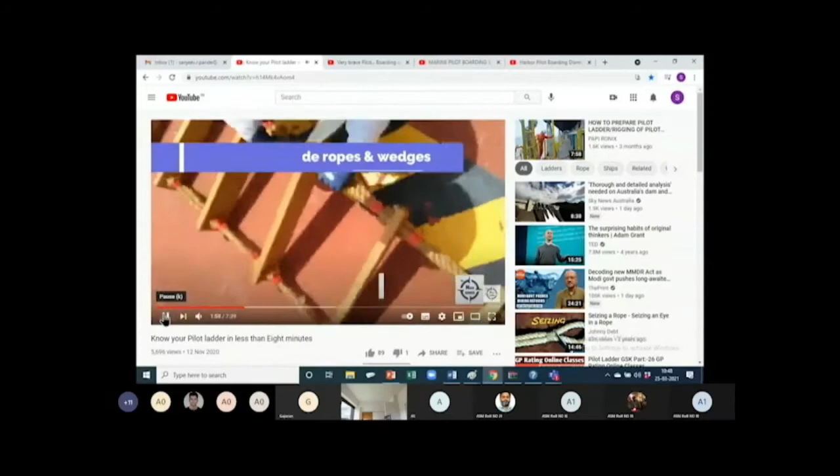Carry out your physical inspection of the ladder. It should all be in clean condition. Inspect the side ropes and the wedges. There should not be any missing wedges. The side rope should have a firm grip. Make sure it is in order. That's a bad example. It should not be like that.

Let's inspect the steps now. The steps should be clean. They should not be painted. They should all have non-slip surface, including the rubber steps. Check the condition of the rubber steps, that they are not cracked. Once again, they should be clean, firmly fixed. Spacing should be even. Look at that, a broken and cracked step. Make sure you don't have that. That's a very shabby ladder which could come off at any point.

Make sure that the side of the ladder is marked with heights along the length. There you can see 6 meters, 5 meters, 4 meters, and so on. We're going to inspect the spreaders now. Check the condition of the spreaders. There should not be any cracks. Should be firmly fixed. Spacing should be even. Let me show you an example of a very, very badly fixed spreader that's really dangerous.

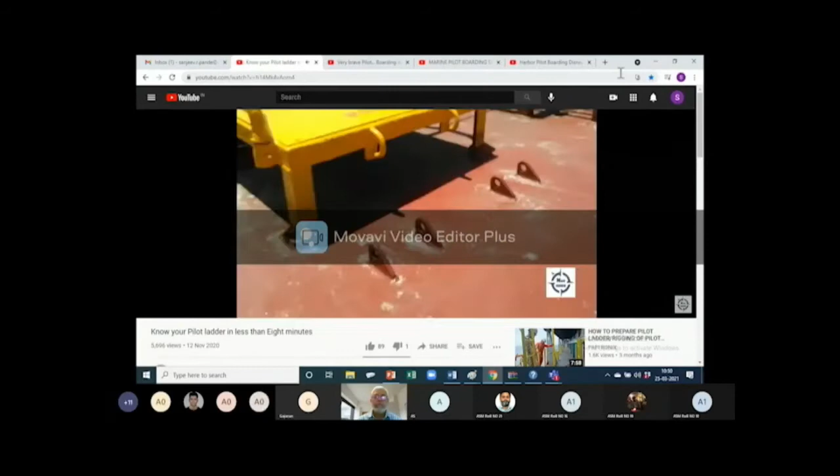So this is the marking which relates your ladder with the certificate. It should be clearly marked. The pad eyes on deck should be color coded with SWL, unlike this one which has no markings at all. The pilot access should be firmly marked on deck in clean condition. The duty officer must be checking this, unlike this one. The pilot ladder must be marked with tags for easy identification with your PMS.

The length of the ladder should be enough to reach the water line in any condition. Now that we have finished with the static checks, we are going to go for the rigging of the ladder. Let's rig it up. The rigging of the ladder must be done safely under supervision of a responsible officer. The ladder must be made fast on deck firmly using the pad eyes on deck, using strong shackles. There should be a life buoy next to it with a line and a light, but the line should not be connected to the buoy.

It should be firmly resting on the ship side with all the steps touching the ship side, and the area should be free of discharges. Look at that ladder. It's a very poor rigging. None of the steps are touching the ship side. If there is a tripping line, there's a right way to connect it. It should not be fastened to the bottom part of the ladder below the spreader. It should always be above the spreader level.

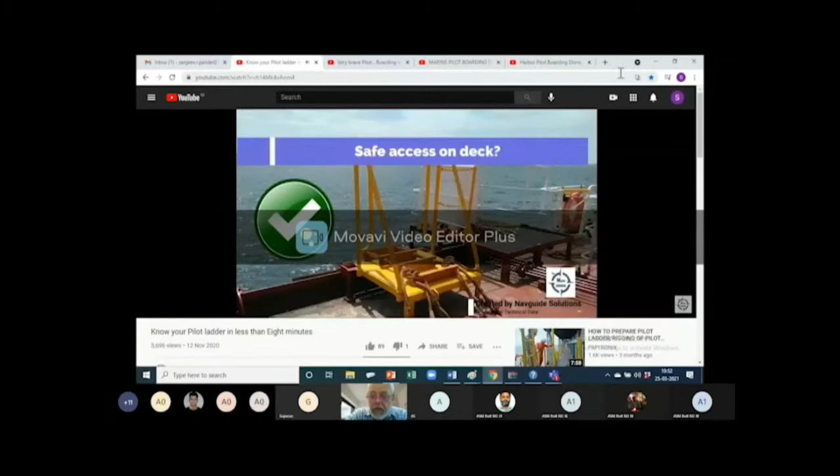Now, the height above the waterline must be suited to the pilot's requirements, and it should never be touching the water. The pilot ladder should be checked by the duty officer after rigging. There should be a safe access for the pilot to come up. That's an example of a very, very unsafe access. It should not be this way. If you are connecting man ropes as required by the pilots, they should be between 28 to 32 mm Manila ropes only.

Let's go for rigging a combination ladder and see what are the precautions to be taken over there. Now, if the freeboard of the ship is more than 9 meters, a combination ladder must be used. A single pilot ladder should not be used. Anyone who's involved in rigging of the combination ladder should always be wearing safety harness and life jackets. Proper PPE should be worn. Now, some ships are using a fall preventer device attached with a harness. This is extremely useful and increases the safety.

The angle of inclination of the gangway should not be more than 45 degrees. That's the inclinometer of the gangway, as you can see. The gangway or accommodation ladder should always be leading aft of the ship. It should also be connected firmly, attached to the ship side. The pilot's climb is expected to be between 1.5 to 9 meters, not less than 1.5, not more than 9 meters, and the pilot must be escorted to the bridge when he arrives.

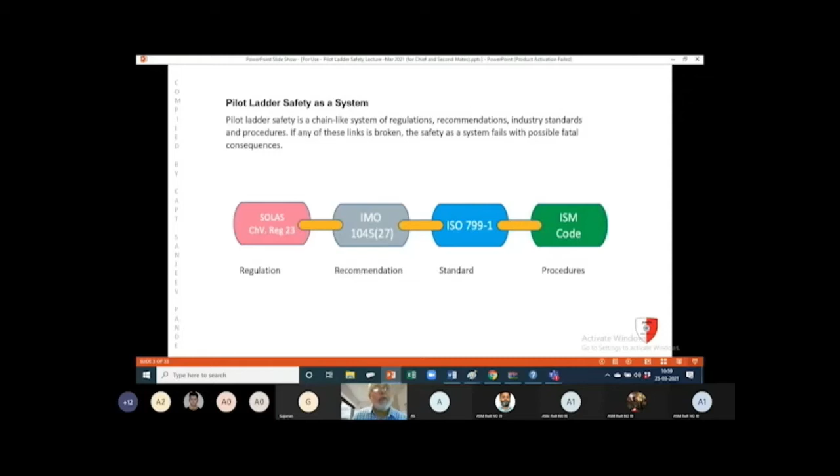So let's start with the basics, securing the ladder. We say, what's the big deal about it? But this is where a lot of issues arise. You see, there are regulations that talk about securing a ladder when it is required at its full length, the supplied length, whatever is supplied to you, the full length.

The lower part of the ladder is open, that's the lowermost step, and the upper part, the top part, ends with two thimble eyes. So the regulations say, attach those thimble eyes to designated strong points on the deck near the transfer point, and use shackles. And pay out the ladder over the side, and there you are. So all the weight is taken by the side ropes, which are the strongest part of the ladder, and that's how the ladder is meant to be. Take the weight on the side ropes.

Only thing is, the length, that is the lower step, may not be at the height required by the pilot, and therefore you have to adjust the length. This adjusted length is called the intermediate length. And how to secure a ladder so that it hangs at the intermediate length? Unfortunately, there is nothing specific mentioned in the regulations.

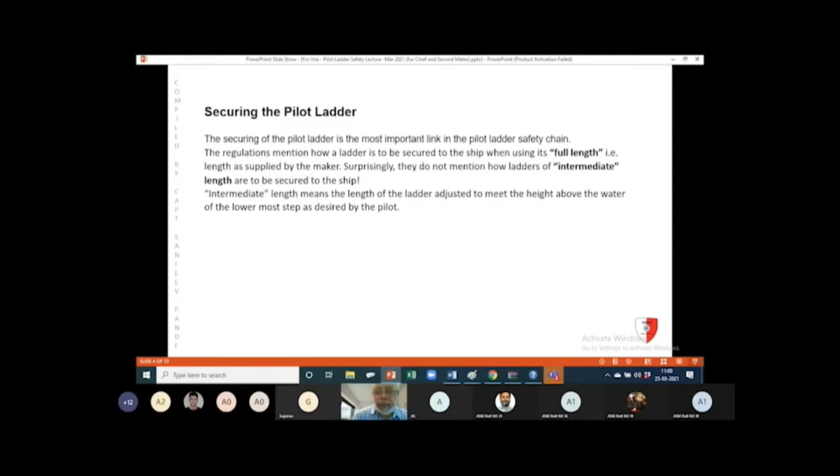So over a period of time, seafarers being very resourceful, they've come up with all kinds of methods, and we pilots and various associations of pilots have done some study and come to a conclusion that there is only one method which we recommend now that ships follow, which I shall talk about in great detail. All other methods should be avoided. They have all kinds of issues.

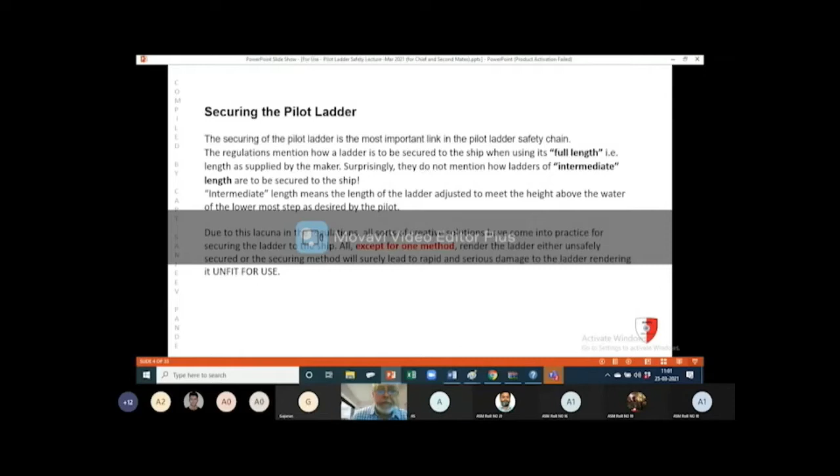One thing I would like to point out is that ships can no longer carry out repairs to the ladder on board, other than replacing a particular broken step or even the spreader. But the replacement has to be done with a part which has been supplied by an approved manufacturer of the same ladder. You cannot just get something or make something on board and fit it to the ladder. You cannot re-seize or reclamp the fixtures which support the steps. You cannot do that. You cannot put any splices to repair the ropes.

So in short, other than doing a simple replacement, that is, a broken step, take it out and put in a replacement step from a certified source, there's nothing more you can do. So it goes to show that if you damage the ladder by improper rigging, then at the next port or even for disembarking, the pilot will refuse to use that ladder. In fact, you should not be rigging it in the first place. That is what is meant by the words rigged and supervised by a responsible officer.

A responsible officer doesn't just have a cursory look and that's it. He is supposed to have trained the crew in the procedures, to ensure that any defects in the ladder are pointed out, and then the responsible officer will make a judgment whether this ladder is usable or not. And you have to take the hard decision of not using a ladder rather than putting out a defective ladder for the pilot.

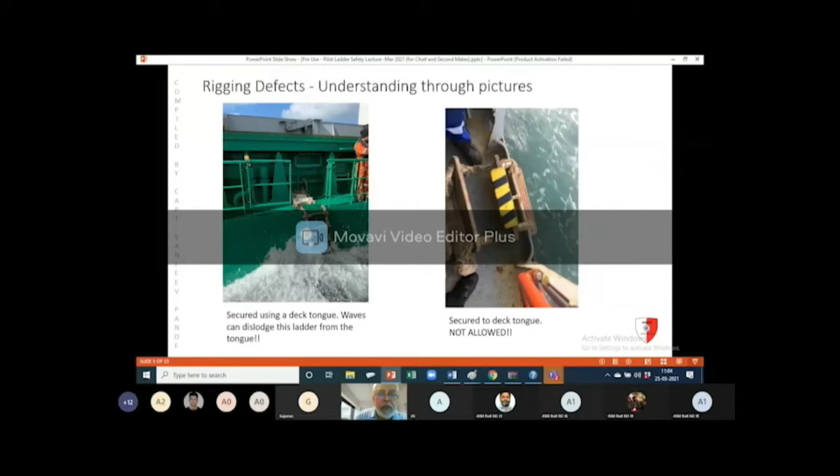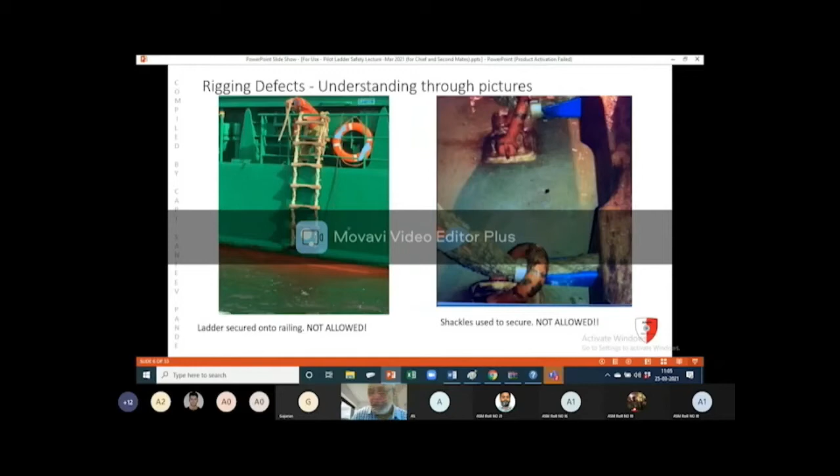You cannot repair it. And you can't just get ladders quickly. They have to be helicoptered, brought to the pilot station. Big problem for you if that were to happen. You found out that damage was caused by shackles. Ladders don't get damaged on their own. They get damaged from use. From misuse, like this, by shackles, they will get damaged.

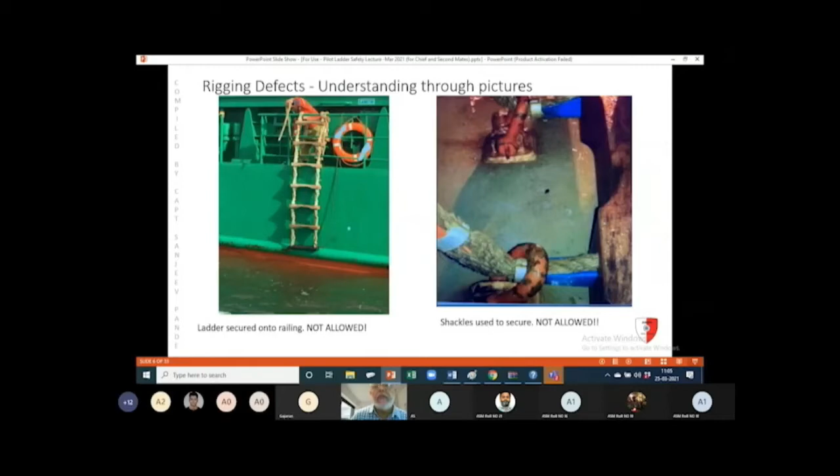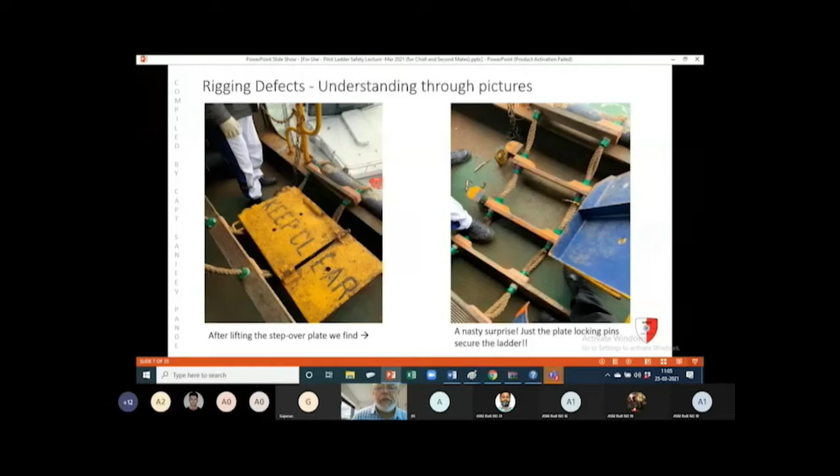Another creative way is a platform to allow a safe footing for the pilot, but the pilot asks the crew to open it up, and where is securing? There is no securing of the ladder. The ladder was basically just kept by the locking pins on the platform. Those 2 pins on the side you can see. Again, not a good method.

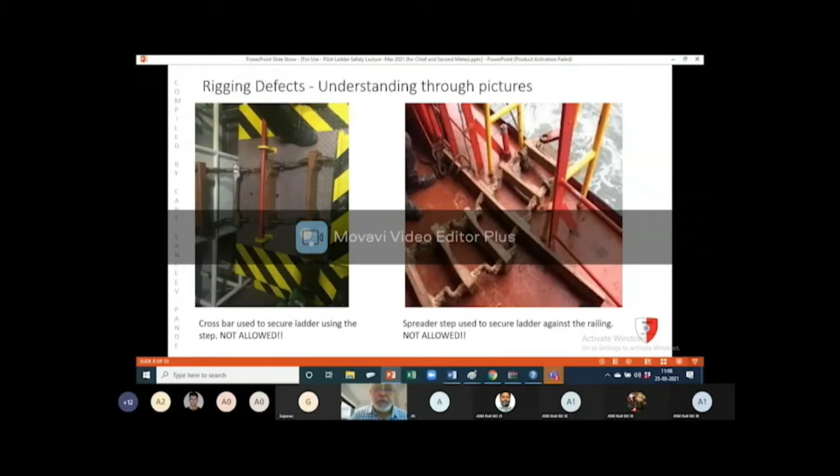Here on the right, they use the spreader to be braced against the side railings. Not good. Then they said, well, as an additional safety measure, they applied 2 shackles, which is also wrong. So, how do we secure the ladder at intermediate lengths? The rolling hitch. Why? Because the side ropes are the primary weight-bearing part. So, the rolling hitch method takes into account this fact.

Side ropes are made of rope of a minimum breaking load of 24 kilonewtons, roughly 2.4 tons, whereas the steps and the fixtures, that is the chocks on which the steps rest, are attached to the side ropes with clamps or seizing. Now that system is proof load tested to only about 8.8 kilonewtons, that's about 900 kilos.

Pilots weigh about 100 kilos at the most with a bag and everything. So then to account for some jerking and safety margin, 900 kilos is applied, but this is still nothing compared to the strength of the side rope, which is 2.4 tons, almost 3 times stronger.

So the rolling hitch, which is applied onto the side ropes, grips them and takes the weight. And while gripping, it does not damage the side ropes. The shackle will, very quickly. One pinch, and the rope is damaged and that ladder is unusable.

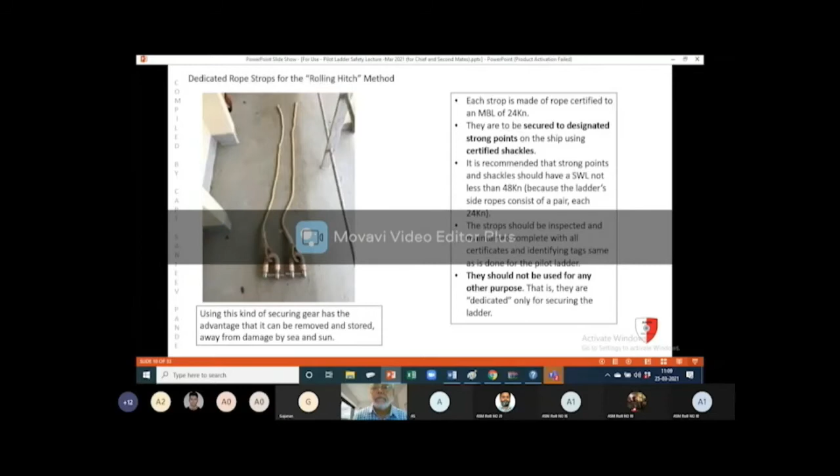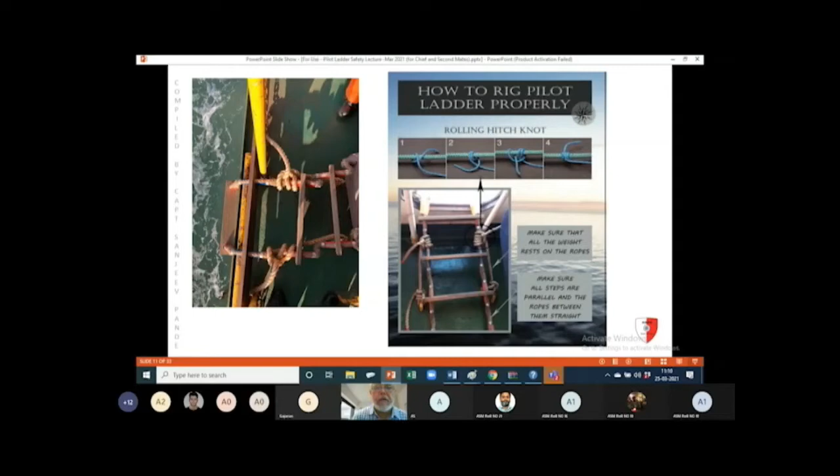So in pictures, this is how it will look. Rolling hitch is a very simple hitch, very quickly you can learn, very easily taught. Lots of little videos available on the internet, how to make a left hand hitch, right hand hitch. Just you have to make sure that the length of the securing ropes is equal and that the knot is properly gripping. You sort of tighten it up. If you tie a very loose knot on the rope, it will not be effective. You must tighten it up.

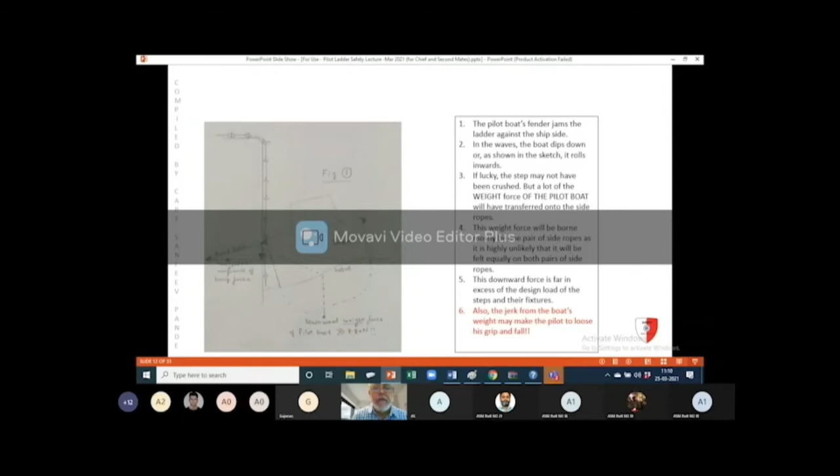So now I will go on to the next point of securing the ladder at the correct length. I have got a better slide than this. That better information is in a Word document. We'll switch to that for a moment. Here. Can this be seen by you properly? Yes, sir. Okay. So this slide I'll explain in some detail.

This is damage due to rigging ladders too low. The typical thing is, okay, you get information from the VTS or from the pilot station, how many meters above the water the pilot wants the lowest step to be. So suppose it is 3 meters, and then the order goes to the crew, rig the ladder on so and so side, 3 meters off the water, and the crew goes and does their job. I suppose they do a risk assessment and so on and so forth, put on their PPE, and they go about doing their job.

Unfortunately, because of lack of knowledge, what happens is the ladder is put over the side, and somebody, maybe the bosun, just has a quick look over the side after it's set. Okay, it looks to me visually 3 meters, it's fine, and then they secure it. Somebody thinks, well, suppose the ladder is too short, maybe we have to again come back on deck and adjust it. So let's put a couple of steps extra out anyway.

What happens? This step remains as it is, but this seizing gets torn out, and the rope gets pulled out. When it gets pulled out, all these steps on this part come closer, while these remain as they are because this has not been pulled out. So then what does the ladder look like now? It looks like figure number 3. This is how it was, nice and straight and parallel before the bump acted on it, and afterwards, the securing point on top got damaged, so the entire length of the ladder has now become sloping. How can the pilot climb on such a ladder now?

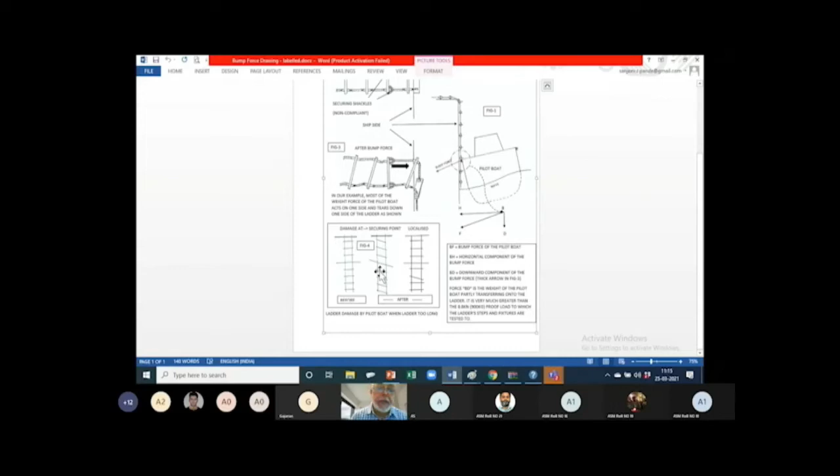One bump is all it took. Your whole entry or departure, or disembarkation, is cancelled. Not good. Can you imagine turning a ship around at the last minute? Maybe if you're lucky, you haven't reached the abort point, and the pilot says, well, it is damaged because you rigged the ladder too long. Another one could be, maybe it didn't get damaged over here, but this particular step can get damaged, localized damage. This can also happen. This is not so troublesome, but this is bad. A shackle will do this.

So what is the remedy? Rig the ladder the correct length, not just by a guesstimate, but by a precise measurement. How to do it? Nowadays ladders have got markings at 1 meter intervals. You can see the markings here. Use this. It's a very nice thing to have. If you don't have markings, it doesn't matter. You can always devise a measuring rope or tape or something, but do it properly. Measure it. Basically, make a calculated rigging. Don't make a guesstimate. A guesstimate can lead to bad consequences.

So here, suppose the distance from the top step, that is from the deck edge to the water, is 12 meters, and the height desired by the pilot above water is 4 meters. So you have to rig it 8 meters long. But how will the 8 meters be determined? By using this measured length. So if you measure it out, you can't go wrong.

Then what happens when you are using a ladder on a shipside door or suspended from under a combination platform, the trapdoor kind of arrangement? Those require a special way of calculating, but it can be done, and it should be there in your safety management system. If it is not there, think about it, and you are now doing a senior officer's course. You can always tell the office, this is what a risk analysis is showing. These consequences are not good. So we need to improve our safety management systems for rigging the ladder at the correct height, and this is what we propose.

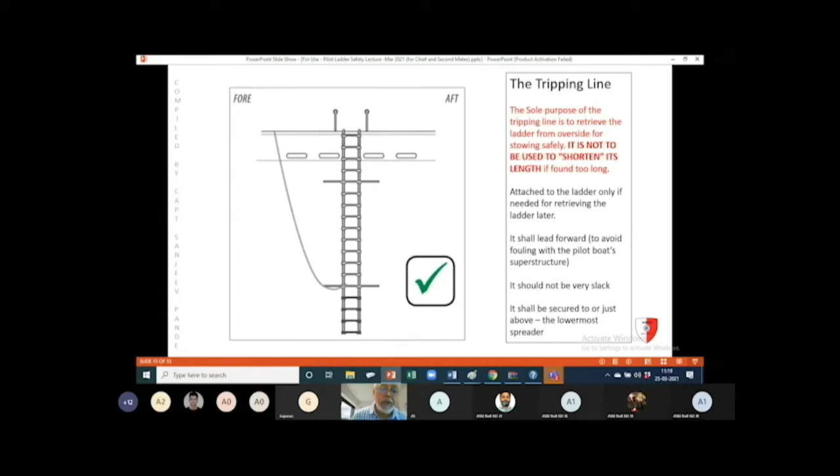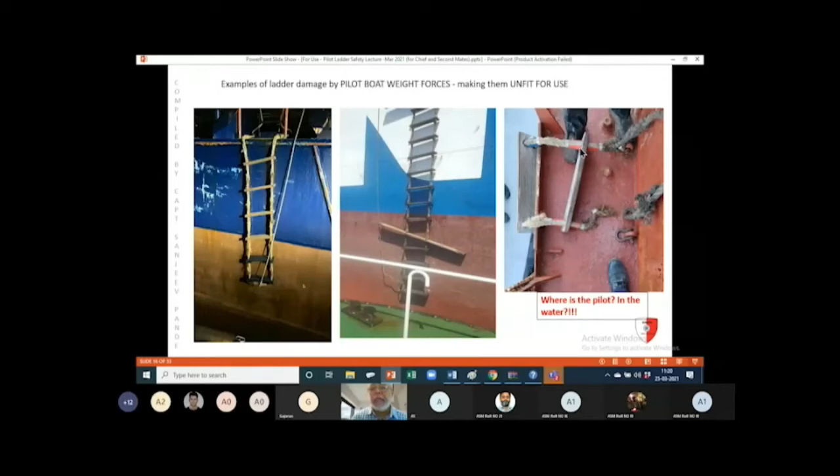And here is an extreme case. Like I said, the force doesn't act uniformly, it acted more on this rope, enough to part it. As it is, the rope is not in good condition, but the shackle is here, nipped it hard, like a knife, it cut through.

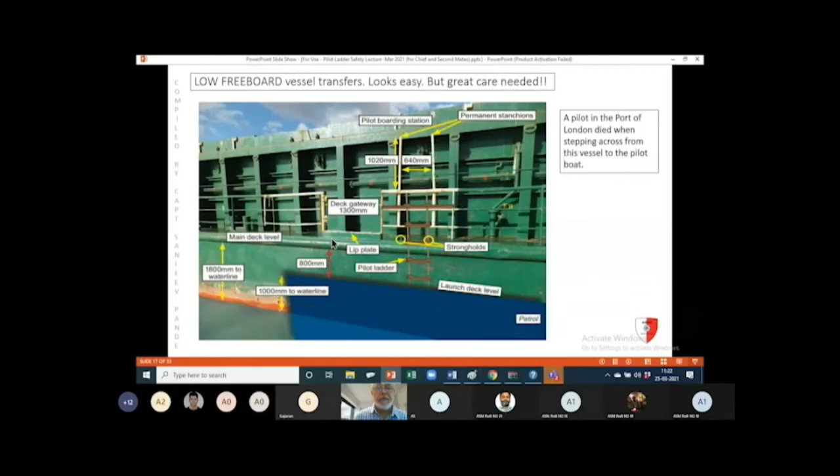Well, this was one suggestion. It is all common sense. The point here is don't take it lightly. Hopping across has been proved fatal. You have to somehow make an arrangement where you have 3-point contact. What I could think of is you climb higher up, and if you have tall stanchions with man ropes, you can have a handhold all the way down.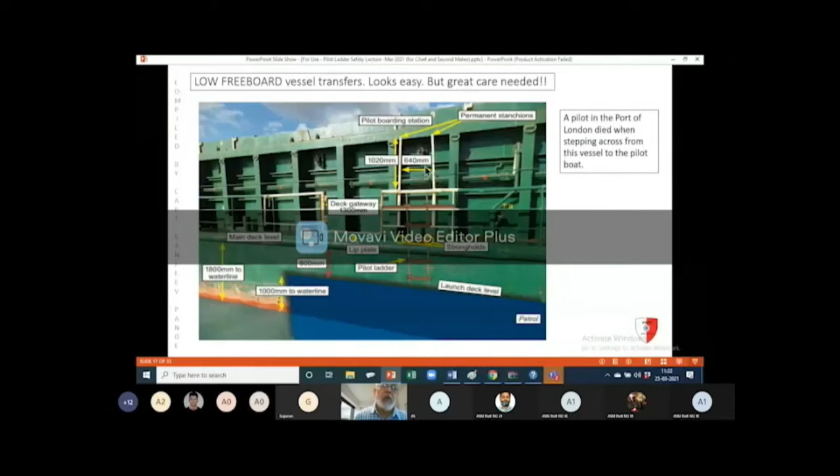Here is an example, taking a little shortcut. Suppose they had those 2 tall stanchions and man ropes. This pilot would be holding it much higher. His hand would be here, which is well above his center of gravity, so he's not toppling over. Over here, his hand is very close to his hip, which is close to his center of gravity. It is toppling him. Very dangerous.

But like I said, sometimes people take shortcuts, and that's where issues occur. Nothing happens when everything goes fine, but when something goes wrong, then you are in trouble. So I would highly recommend that if you are on these small ships, take care, don't take it lightly.

Even from a 1 meter height, by the time you hit the water, you'll fall at 16 kilometers per hour. It's quite a hard smack you'll get. And from 9 meters, you land up at 48 kilometers per hour. That is as good as hitting concrete. So 9 meters is a turning point after which you have to rig combination ladders.

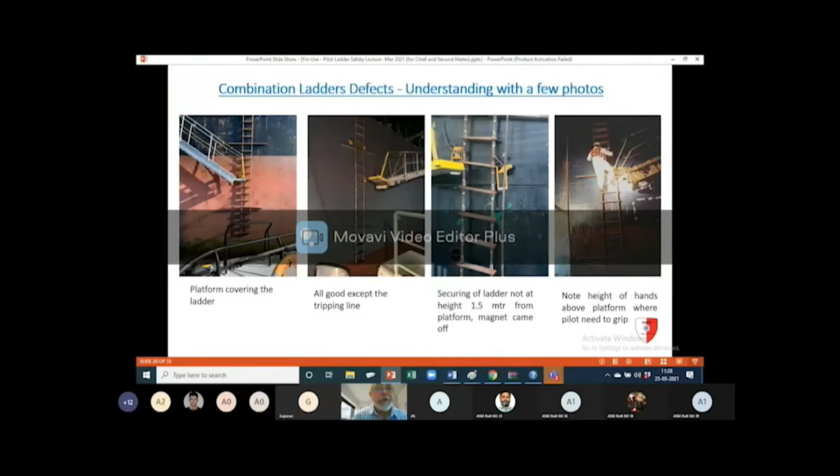The right hand side picture, you can see that the ladder is secured at a higher place. So it allows the pilot to go up. So you can see how high he has to go. His leg has to reach the level of the lower platform. Only then he can transfer. So that's why the ladder must be secured at least 1.5 meters above the lower platform. And the lower platform itself is secured separately to the ship side. There's some good riggings.

These trapdoor arrangement platforms, that is the ladder is suspended under the lower platform itself of the gangway. That's quite an unusual, not very well thought out arrangement. The trapdoor itself is problematic, and if the pilot boat bump force were to act on the ladder, which is maybe rigged too low, then you're going to pull the whole weight onto the falls of that trapdoor or the lower platform, and you don't know how strong those falls are, whether they can withstand the weight of a pilot boat weighing down on them.

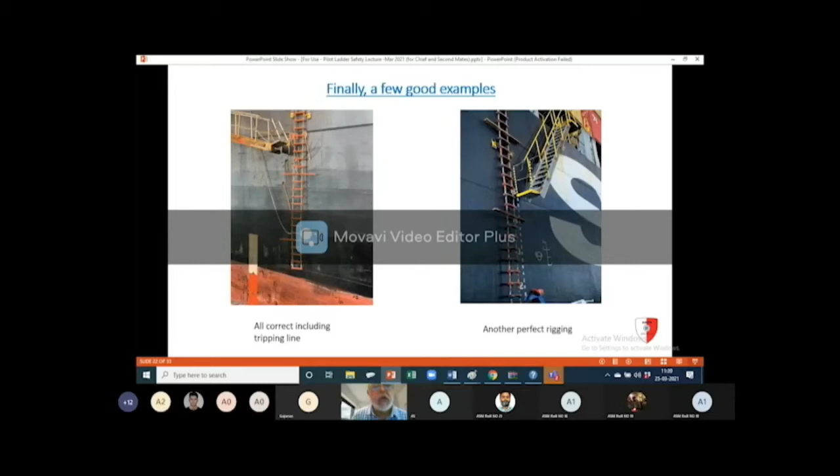Unlike the separate combination ladder and ladder, at least they are 2 separate units. The whole gangway won't come down. But the other one, which is one unit, not good. In any case, that unit also, I've seen very often, doesn't have any securing arrangement. It doesn't get secured to the ship side often. They're saying, well, it's got 4 legs of falls, it won't move around. It does move. Bad rolling, it does move, and it's not good at all for the pilot to be hammered back and forth while climbing up an unsecured system. So that also is a flaw in the trapdoor arrangement.

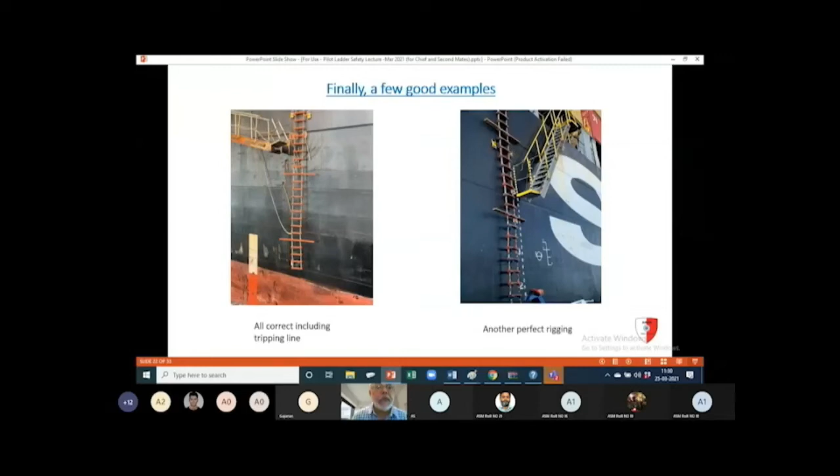So we'll go to some other finer points. We have different arrangements for high freeboard ships, especially these ultra large container ships and ro-ro ships. So they have these side doors or even winch reels to rig up the ladder to help the crew. Otherwise, it's very heavy. Only flaw is now the winch reel must not take the weight. The ladder must be secured to the strong points on deck.

Rolling hitch again. So those ships, you go on board, you don't have securing points over there. You must get the securing points made, and rolling hitch strops made on board, and eventually properly certified supplied ones indented for. Then you must be securing the ladder properly to the ship, with no weight coming on the winch reel. The winch reel should be locked in position and the power, air or electric supply, isolated.

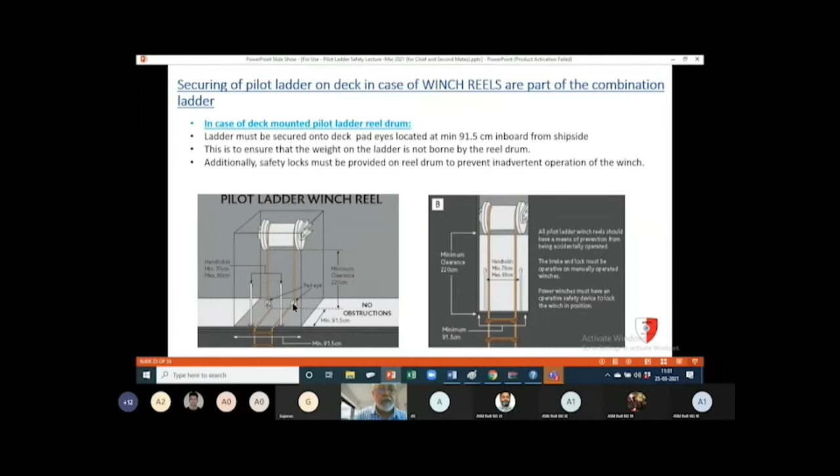The drawing on the left, this is to be corrected. This is not correct. It's not a pad eye. It's just a leading eye for the rope. This drawing is not conveying the correct meaning. What I say is this should be a pad eye and it should be secured with a rolling hitch. No weight. This rope should be slack.

Here it is, what I was talking about. A rolling hitch should have been applied. This is a strong point, maybe here. Thimble eye one end, other end rolling hitch on this part, or this part better, and tighten up equally. No weight on this, no weight here. Same thing over here, different kind of arrangement.

A long sort of trailing rope is there before a ladder hanging on the side. This is also, like they say, led up like in the IMPA poster. This is what I'm talking about. This is wrong. It should have been again a securing strap with shackle and rolling hitch tied over here. No weight on the winch.

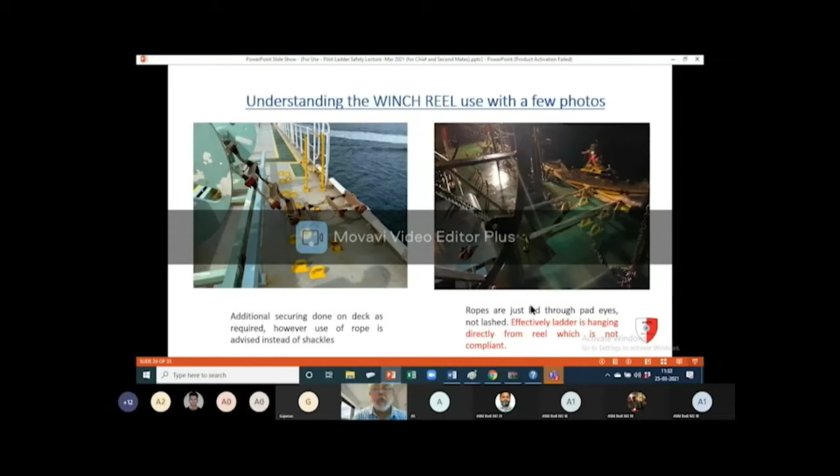Hull doors. Rules say you cannot open outwards. And again, if they have a winch inside, with no weight coming on the winch, you should ensure that you have an arrangement to secure the ladder with rolling hitch up to two strong points.

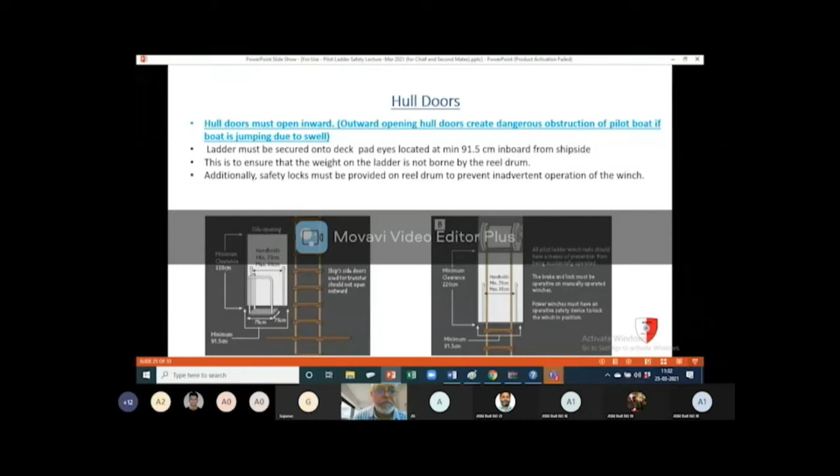The left hand one, here you can see a ladder just like a combination ladder. This ladder here also should be secured about 1.5 meters above the platform, secured to the ship side to prevent twisting and moving around during the transfer. This is what the photo is showing of the ladder required to be secured to the ship side to prevent it from oscillating and swinging like a pendulum.

Only thing is, in this drawing, they have secured it too low and only one rope is secured. This is guaranteed that the pilot is going to have a very bad mood when he tries to come up. Because even this person watching, he'll see the pilot twisting and turning around or the ladder almost flipping over, because only one side is secured and that too low. This should have been secured further up, 1.5 meters above, and both should have been secured, this rope as well as this. That would have been a good transfer, the pilot would be in a happy mood.

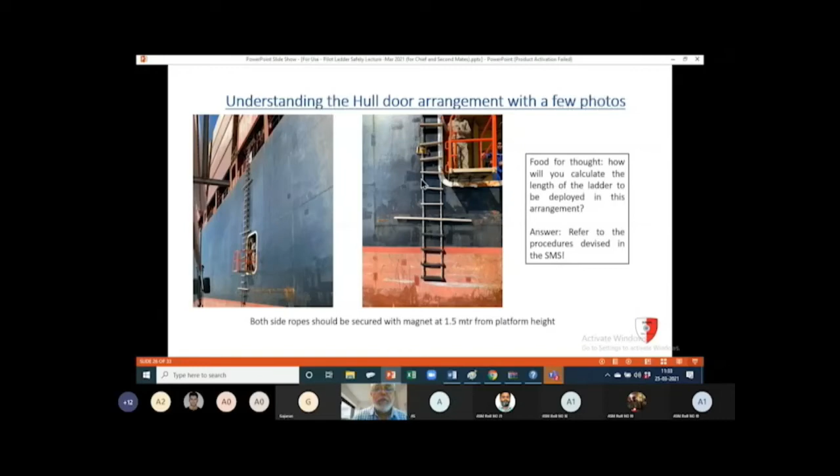So, trap doors. The issue with trap doors, why I'm pointing this out is, our efforts are on to get all these defective things replaced with the proper compliant ones, or better, because you can't really say they're non-compliant, they are very bad. By accidents and fatalities, they've been proven to be non-compliant, even though pilots have been complaining about this so often.

Sadly, it takes a death for people to wake up and start doing things. Only now, lately, some shipping lines have started doing it on a fleet-wide basis, but still, it should not be that way. Now when you go on board, you should try and get these things changed to the more suited ones.

You try climbing up this, so far okay, you're able to grip on this, but how do you go across this channel bar and these horizontal pipelines, piping here, which is very slippery, not good. A grip on a vertical rope is far, far stronger than a grip on a horizontal fixture. So it says that this pilot ladder should continue further up for 1.5 to 2 meters at least, and then the pilot should be able to transfer onto the platform. You can see the pictures over here. Let's go further.

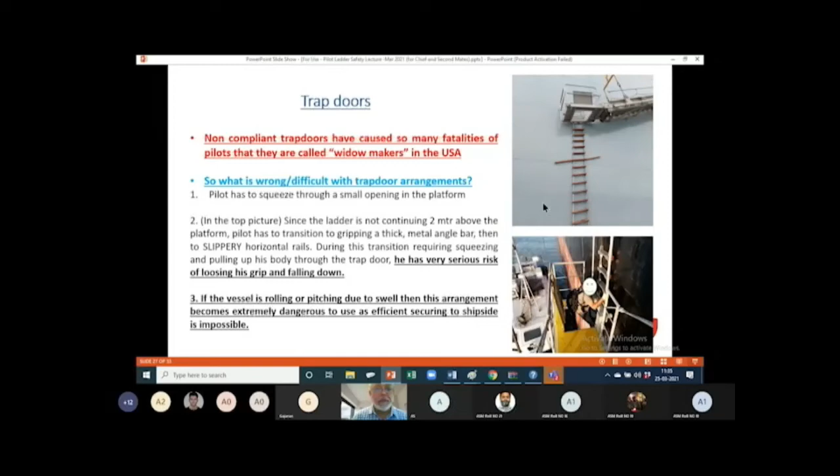So this is a good arrangement. See, it's gone all the way up further. Of course, this is a separate unit, not part of the platform. Here I'm talking about, this is part of the platform, this ladder suspended from this whole contraption. Here it is separately attached to the deck and the platform is just placed around it. See, here it is secured to the ship side, 1.5 meters above. So this is a good arrangement.

Over here, of course, the ladder itself is going up into a U-shaped kind of frame. That's how you can get a good grip. One ladder all the way, no transition to some funny kind of handholds. And this is a good arrangement. Only thing is, this whole contraption is not secured to the ship side. I'm very worried about this. In rolling, this whole thing goes in and out and slams hard. Not good at all.

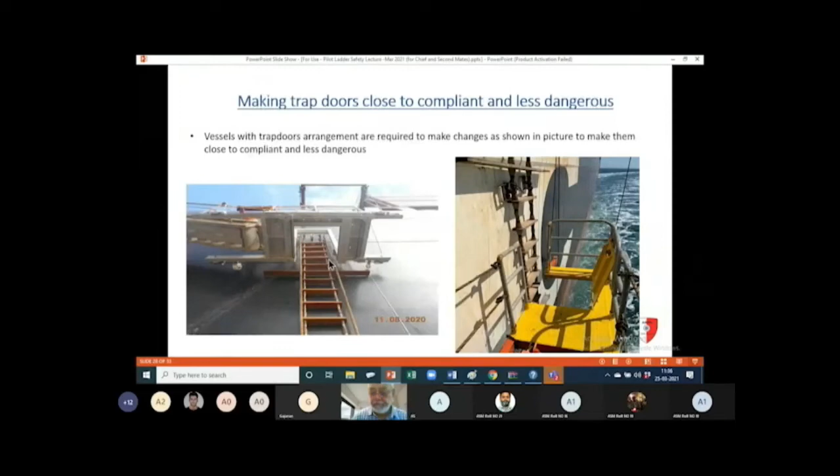So some associated equipment, we are almost finished. Associated equipment. So the amendment to the resolution about associated equipment says that now the step ladder, the bulwark ladder, and the stanchions should be separate, not combined into one unit.

Man ropes to be put up and placed over the side only if required by the pilot. They can be kept ready in case you are in doubt. You can keep them ready, rig them up to the same height as the lowermost step, and then bring them back on board. If the pilot wants, you can easily just lower them down. If he doesn't want them, no problem, they're always there. But if at short notice you start running around because you want them, it's not good. So have them rigged if you are not being specifically told.

And one point I want to mention before we go further is that sometimes we make an estimate of 3 meters above water level, but when the weather changes or worsens, or we find that a different boat is allotted to the pilot, which has got a different height above water, or some communication gap is there, whatever the reason, at the last minute the pilot, when it approaches the ship, tells them, no, please lower the ladder 2 steps or raise it 2 steps.

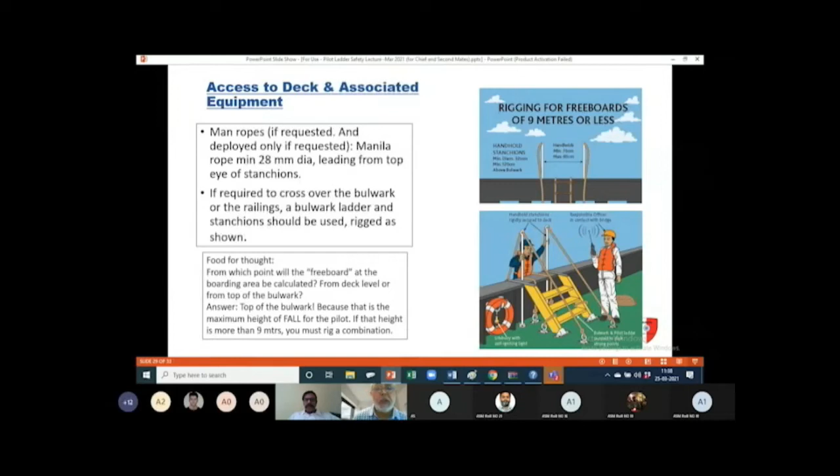So you should have not just one officer going on deck to receive the pilot. There should be sufficient crew in case a last minute adjustment is required.

Some other things you might find here: on the left hand side, the securing points are so close to the ship side, you don't know how to secure that. How will you put a rolling hitch? The first thing you do if you go on board a ship like this, get this thing shifted properly here and certified. These points should be approved to a certain safe working load and then put in use, marked, and this one decommissioned. The right hand one is okay.

The ladder ropes are protected from the wire falls with this guard, and also from the sharp edge of the ship side by this kind of rolling curved protection piece. This is very nice. This is not really about securing, but it is also useful to have. If you don't find this there, you can get something like this fitted to protect your ladder from damage.

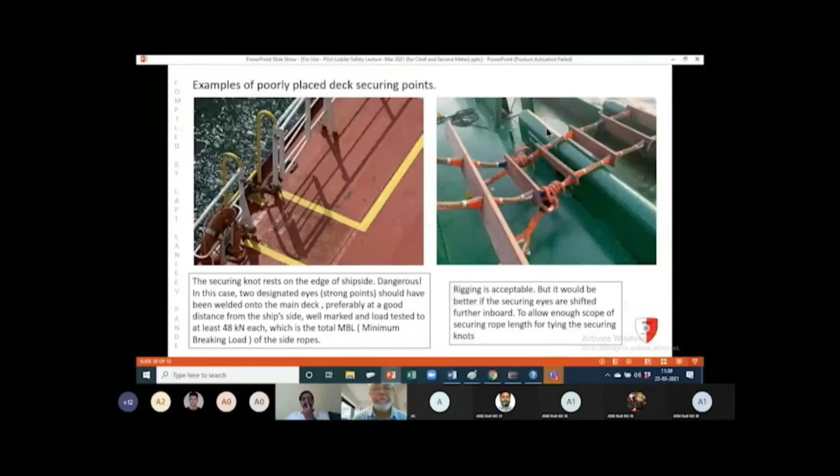Safe approach, what we saw in the video. Here we can see a picture. A pilot boat can get hit very badly when it rolls or the ship rolls, and it can damage the boat or even capsize it by this thing catching the edge of the pilot boat. So this is a very small gap. They want at least 6 meters, which is more reasonable and within the ability of the boat to maintain position during a transfer. 6 meters is within the capability of most boat handlers.